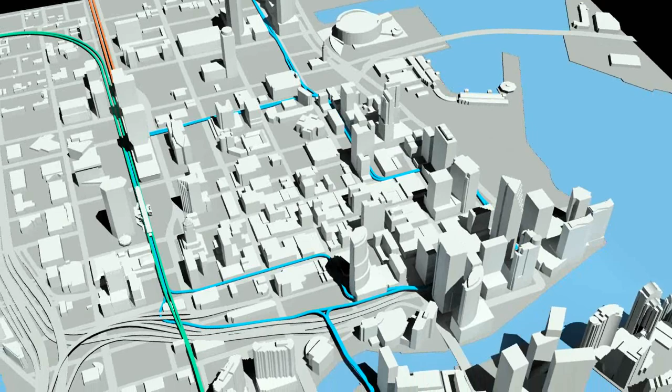And you can kind of see the intensity of development. More recent buildings are further to the east, maybe on Biscayne Boulevard, and a lot of the older 1920s, 1930s commercial buildings along Flagler Street, and then of course the Government Center itself.

What's interesting is you can see the progression of the different kind of character of the urban form, where you have the larger, newer buildings clustered around the boulevard, the older buildings which really create that walkable pedestrian feel of the traditional character downtown, and then the Government Center itself, where you see larger buildings and a lot of undefined open space.

Can be kind of nice, in the case of the green space directly to the west of the Government Center building. Then there's other just kind of open areas that don't really serve a lot of purpose.

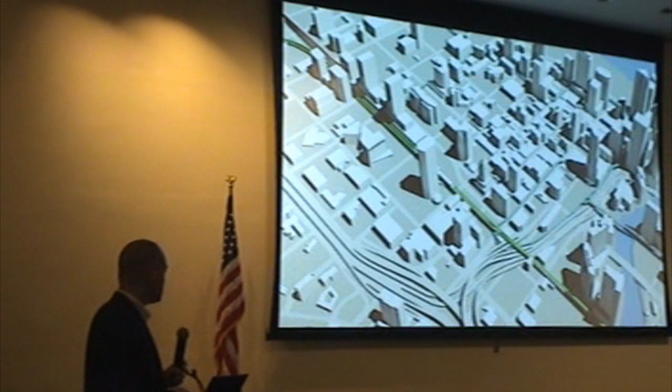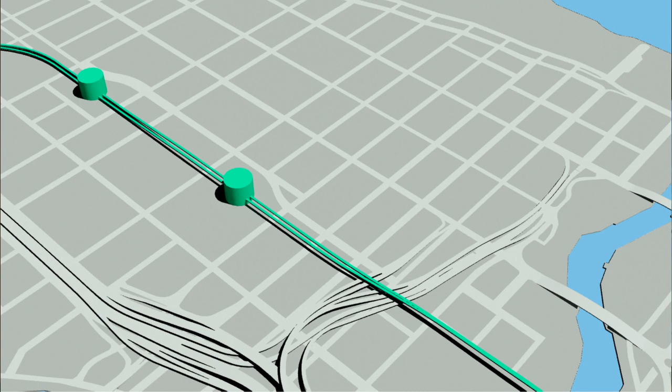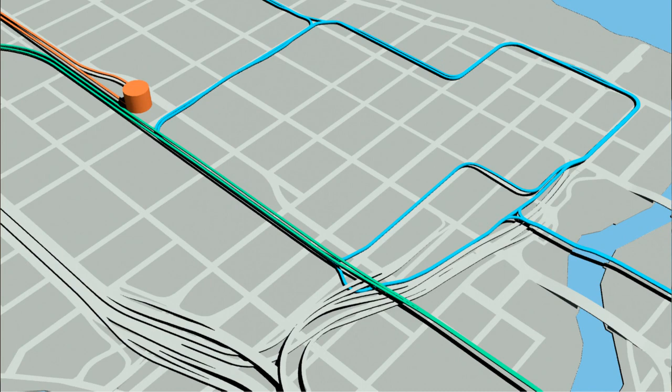So just again, to give some context, the major streets within downtown - again, we're right about here. Obviously the expressways, Metrorail, metro stations, Government Center, the Overtown Station, and the Metromover network and its stations. And then the all-aboard station - you have to take the all-aboard if you go to Fort Lauderdale or West Palm Beach. There's the all-aboard and the Government Center buildings in orange.

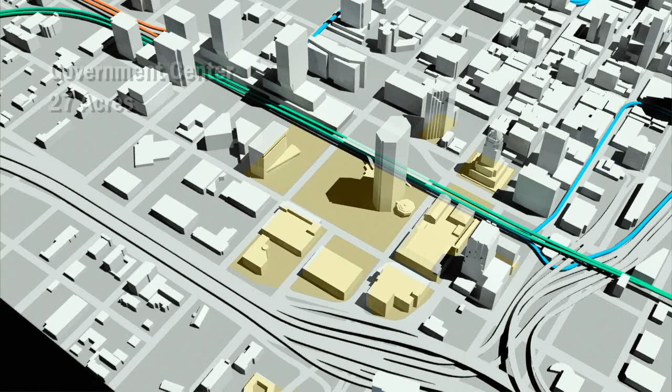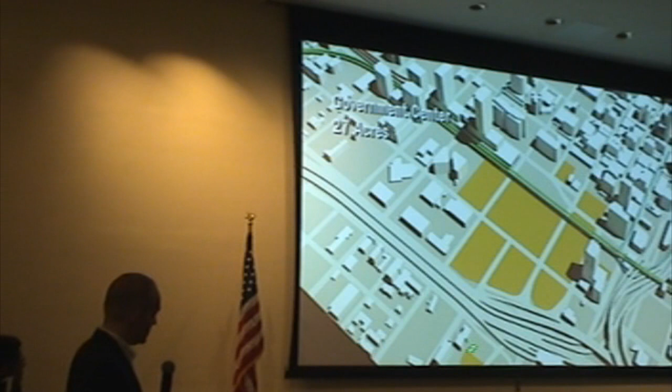So let's zoom a little bit more into where we are specifically looking at today. Again, the 27 acres that we're looking at, mainly along Northwest 2nd Avenue, Northwest 1st Street, and the Metro on the east, as well as the old courthouse, and then the old CAA building along the North River Drive.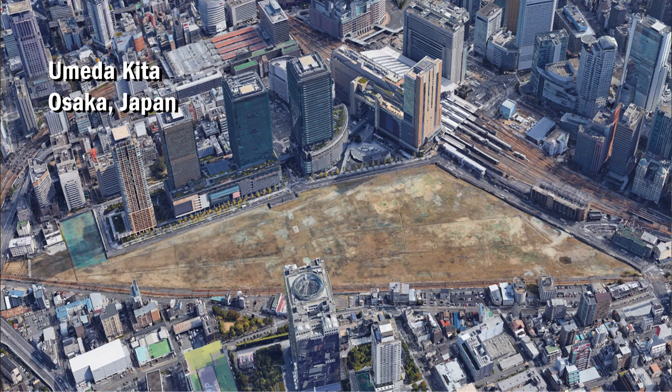So it's really quite a nice destination. In Japan, which has an extraordinary collection of transit-type developments linked to train stations, this is in Osaka, and this is the main train station in Osaka. This was an old freight rail yard, and this was also a freight rail yard as well. There were two stages of redevelopment. Obviously, this is existing today, and this will be redeveloped in the future. Again, there's the station, there's the first phase of the development, and then here's the second phase.